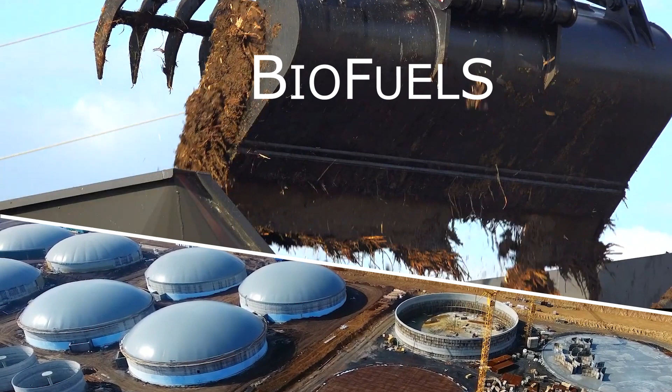Agriculture makes use of the most precious natural resources, land, water, sun, and is therefore responsible for reconciling production needs with environmental protection. Faced with a growing world population and changing food consumption, and the need to produce biofuels for the energy sector and materials with a low environmental impact, agriculture now plays a decisive role.

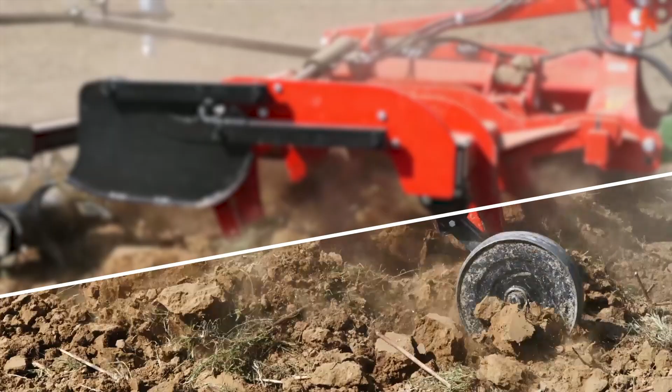The primary sector can only meet the great challenges of our time through the use of innovative machines and new generation technologies.

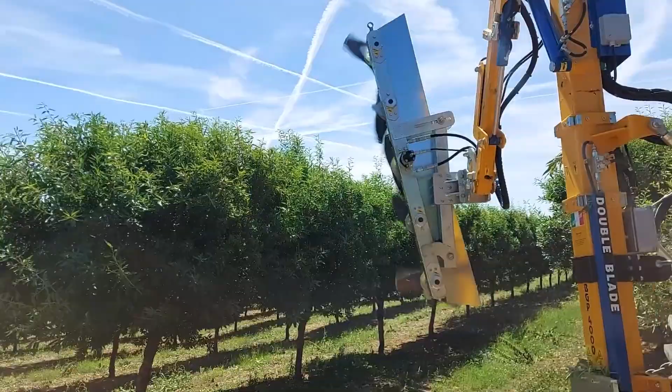Created to increase the productivity of the land and to support operators in the most tiring jobs, agricultural mechanization today has an additional function, that of managing production factors in a scientific way and ensuring the sustainability of the processes.

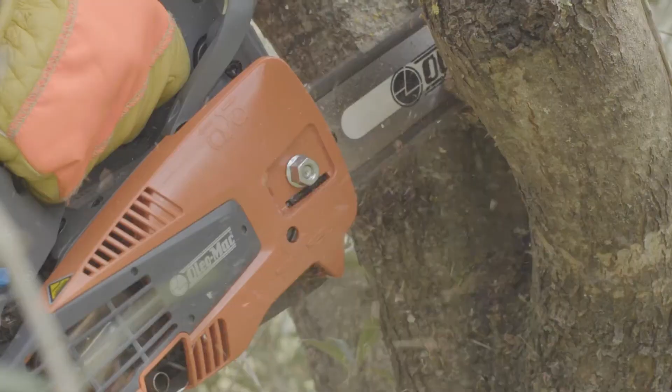On the gardening and landscaping front as well, mechanization is called upon to perform increasingly complex functions linked to citizens' health and quality of life.

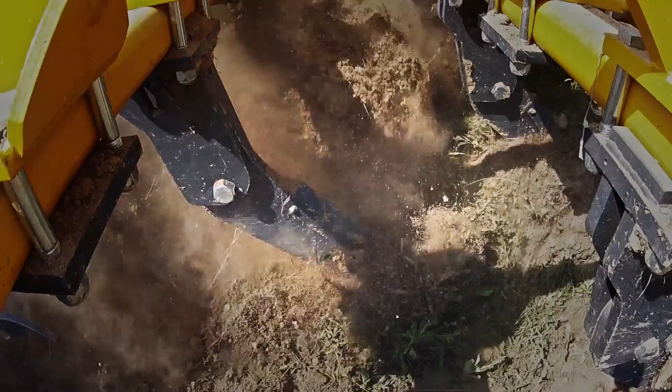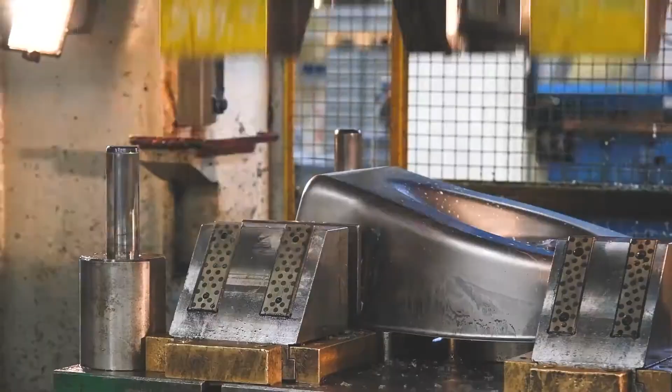Performing plowing and tillage without altering the organic structure of the soil, moving across farmland without soil compaction, performing treatments without dispersing pesticides into the environment, irrigating crops by optimizing water resources, harvesting produce by making use of residual biomass are the functions that agricultural mechanization has successfully tackled in recent years.

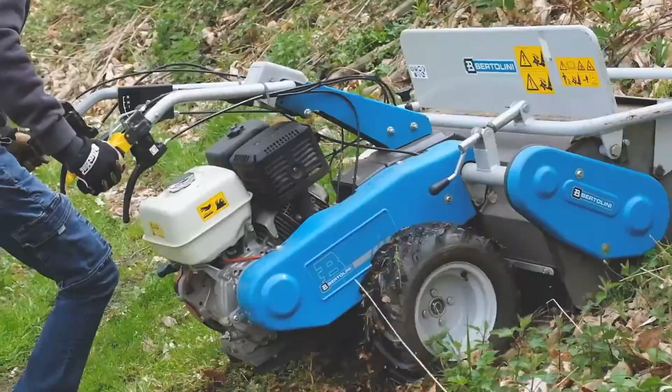Even in gardening, mechanization today offers safe technologies that are compatible with the metropolitan environment, offering innovative means in accordance also with bioarchitecture and new forms of aesthetic and recreational greenery.

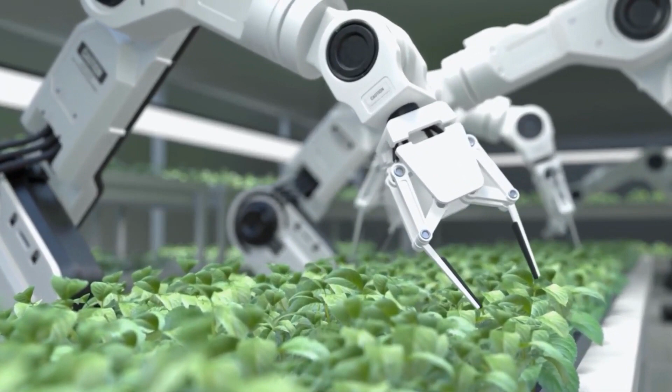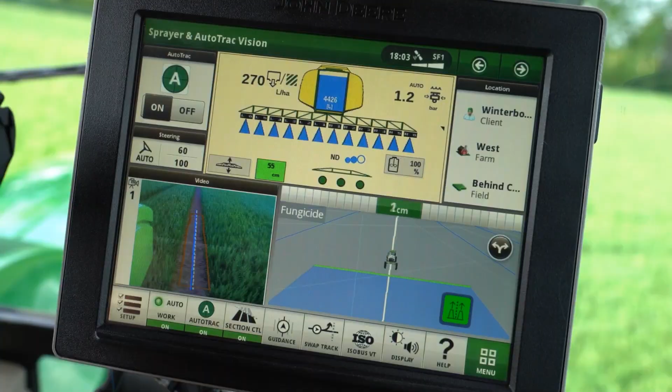New generation technologies enable a scientific approach to agriculture and green care, thanks to the increasingly widespread use of precision satellite and computer systems, sophisticated digital and IT tools, drones for specific interventions, as well as highly automated robots and devices.

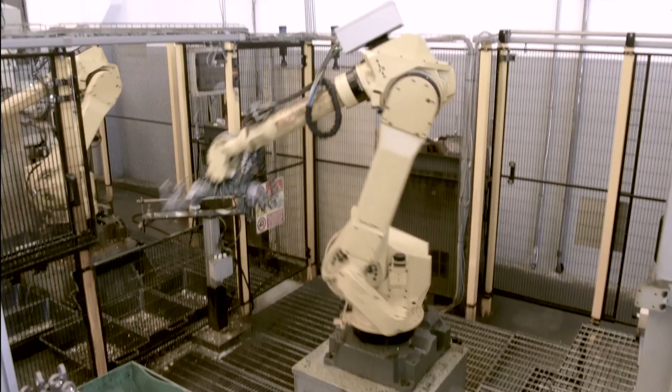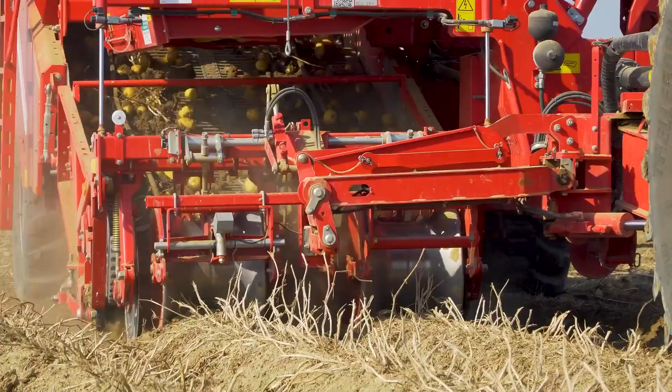In this industrial sector, Italy occupies a leading position worldwide in terms of production capacity, range, and quality of technologies. Innovative tools for soil tillage, sowing, treatments, harvesting and initial processing of products, transport, livestock farming, irrigation, forestry work,

gardening and landscaping, as well as specialized components, are produced by Italian industries in an infinite number of models, suitable for every production setting and every agricultural model.

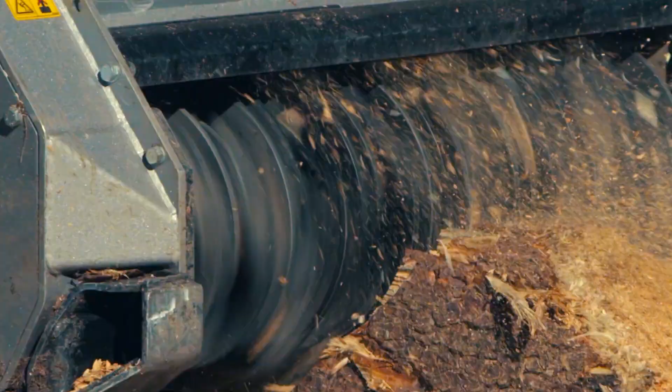Federunacoma, the Italian Federation of Manufacturers of Machinery for Agriculture, Forestry, Landscaping and related components, is the body representing these mechanical sectors. Founded in 1945 and a member of Confindustria, Federunacoma is made up of 7 specialized associations.

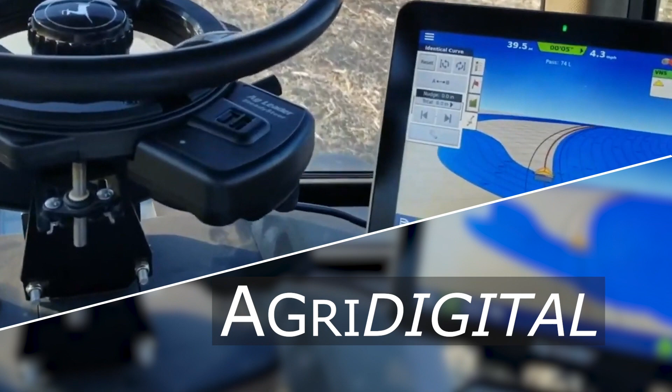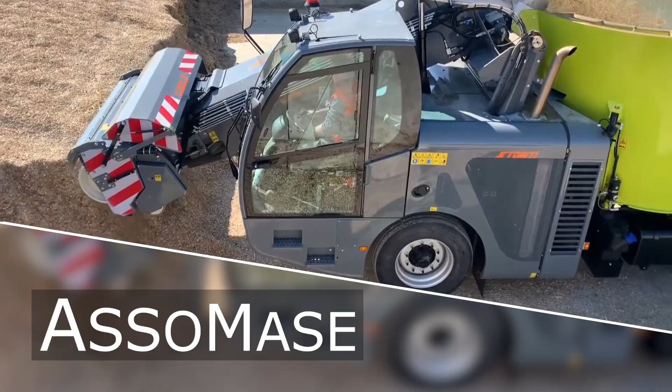AgriDigital for manufacturers of specific digital technologies for agriculture, AssoHidrotech for irrigation systems, Assomao for equipment manufacturers, Assomase for self-propelled operating machines, Assotrattori for tractors, Comacomp for components, and Comagarden for gardening.

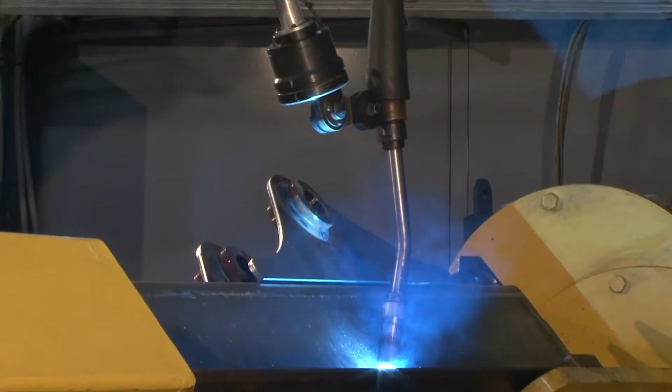The Federation brings together more than 300 companies, with a total turnover of around 14 billion euros, of which 65 to 70% goes to exports.

Its diverse structure includes offices in Rome, Bologna, and Brussels. As part of the European and international networks representing agricultural mechanics, it is an active participant in technical and political roundtables concerning the sector and offers a system of specific services for member companies.

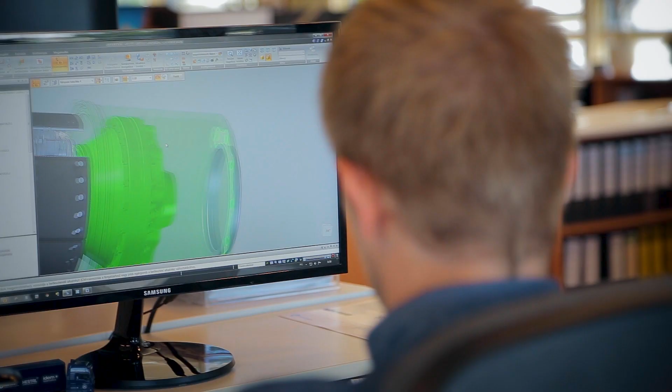Among the activities carried out by the Federation, technical and statistical services, promotion on foreign markets, training and research development are particularly important. With regard to research and training in particular, the Federation collaborates with universities and specialized centers in

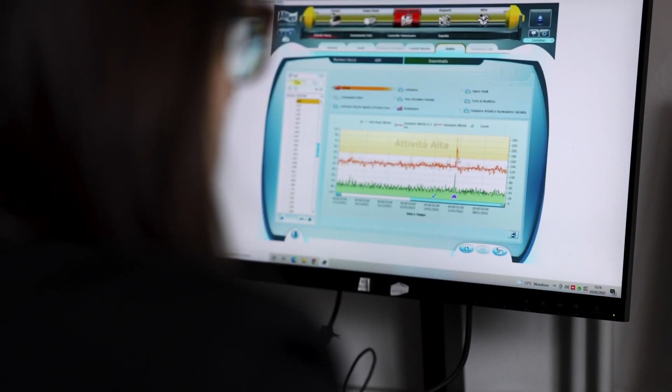various Italian regions, and is active in EU projects for the development of technologies suited to the growing needs of the primary sector.

The fundamental objective of FEDER-UNACOMA is the development of the mechanization market, which the Federation achieves not only by supporting companies and participating in promotional events and trade fairs in Italy and abroad, but also by organizing exhibition events of considerable appeal.

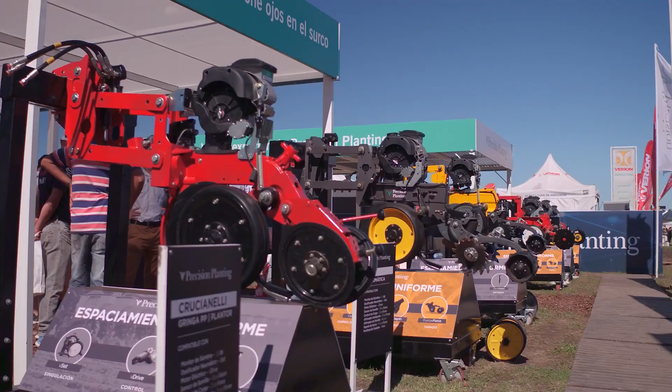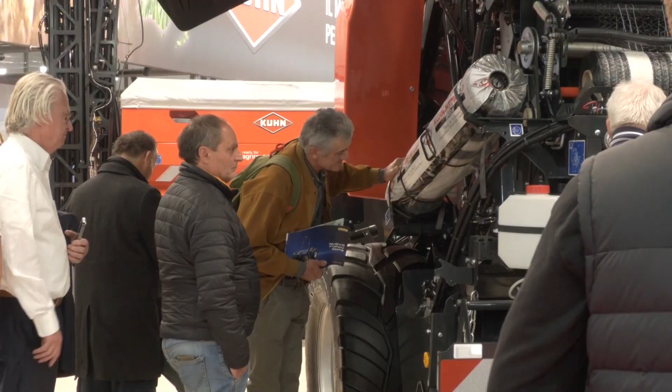EIMA International, the exhibition dedicated to agricultural machinery that is held every 2 years at the Bologna Trade Fair and is one of the world's largest sector events, is directly promoted by the Federation and organized by the service company FEDER-UNACOMA Srl.

In the pavilions of the Bologna Exhibition Center, one of the benchmark venues at the European level, where an expansion project is currently underway with the construction of new pavilions and the redevelopment of the district according to standards of excellence, EIMA presents more than 50,000 models of machinery and equipment, divided into 14 specialization groups.

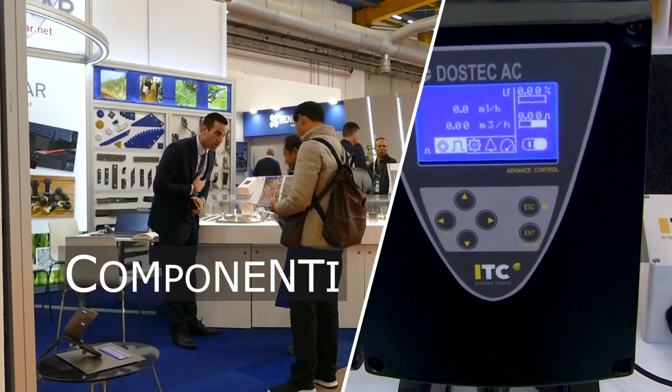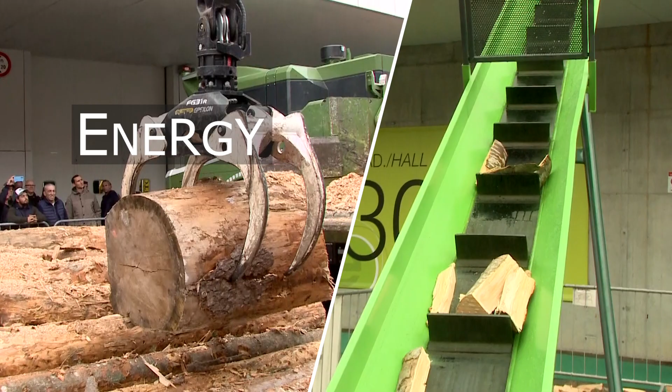These are supplemented by the components-themed shows, dedicated to components for the sector: Green for gardening and landscaping, Energy for bioenergy, Hydrotech for irrigation, Digital for electronic and IT applications, as well as the campus area reserved for education and training.

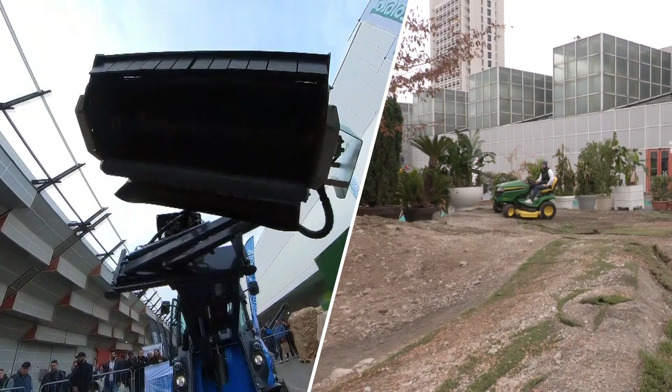Open-air arenas reserved for tractors, gardening, and bioenergy machines allow visitors to attend dynamic tests of the most innovative mechanical equipment.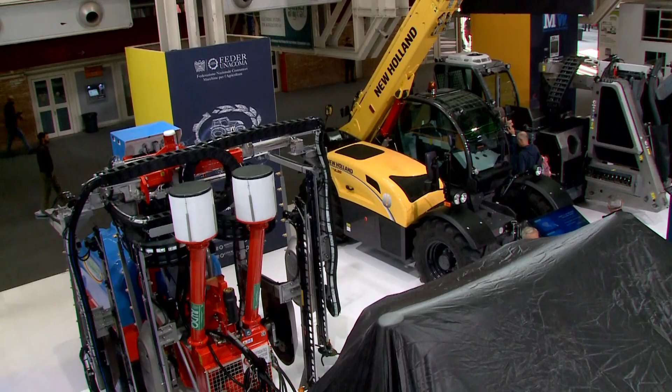An audience of more than 300,000 economic operators, farmers, contractors, and technicians, as well as agricultural and engineering students from 170 countries, meet at this biennial November event to learn about the most innovative technologies.

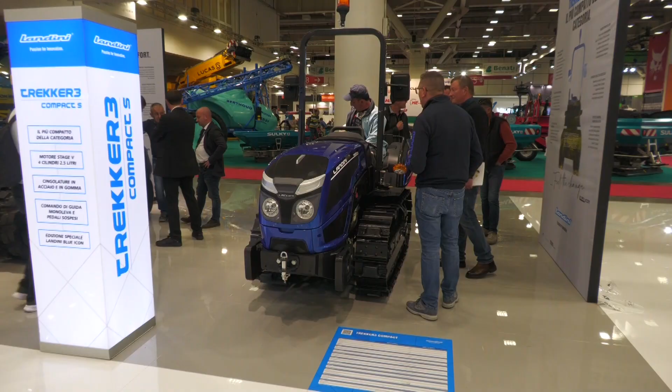They can compare machinery produced by some 2,000 manufacturers from more than 50 countries, participating in an event that is important not only on a technical and commercial level, but also in terms of communication, with a rich calendar of conferences and cultural initiatives.

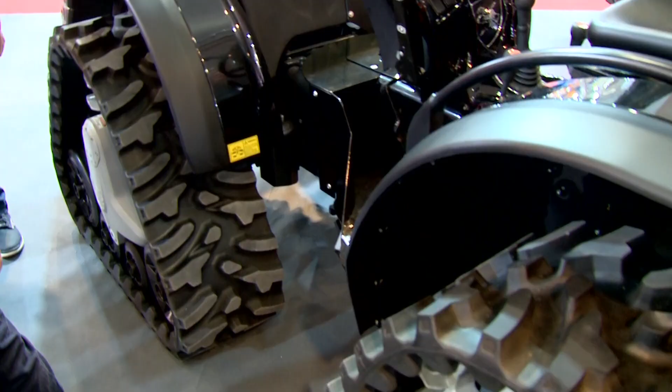Another important event is AgriLevante, the biennial exhibition of technologies for agricultural and agro-industrial supply chains, which FEDER-UNACOMA organizes in Bari in collaboration with Fiera del Levante, with around 400 exhibitors and over 80,000 visitors. It is the reference point for operators from the entire Mediterranean region.

Specialized exhibitions and events on agromechanics, and in particular on the vine and olive tree sectors, and on applied electronics and robotics, involve the Federation as an organizing partner.

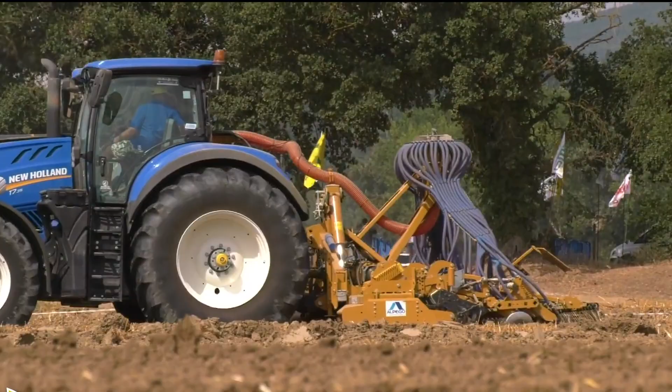Furthermore, field demonstrations called EIMA Show are organized in ever-changing agricultural settings, remaining one of the most striking formats in the range of events promoted by FEDER-UNACOMA.

Traditional fairs and field demonstrations also characterize the activities of the Federation abroad. Since 2009, it has been organizing dynamic events in India, above all the biennial EIMA Agrimach, in collaboration with the Indian Federation of Chambers of Commerce and Industry, FICCI.

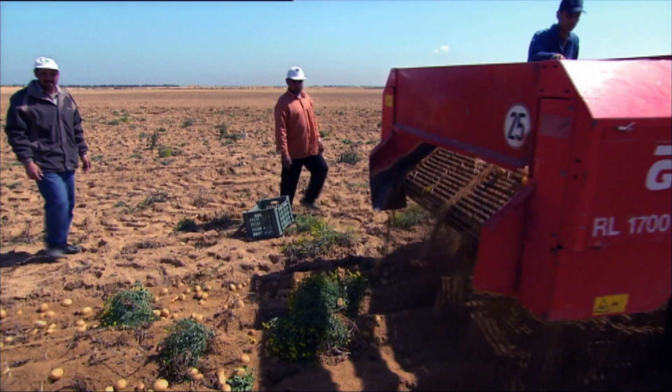FEDER-UNACOMA's calendar includes other exhibitions collectives, also organized in collaboration with the ICE agency, and trade fair partnerships in countries where demand for agricultural mechanization is developing.

Wherever agromechanical innovation spreads and Italian industry is present with its know-how and technologies, one can see how much inventiveness and research can do for agriculture and the environment.

Wherever the best industrial production is put at the service of agriculture, it is possible to reconcile the logic of production with the preservation of natural resources. It is possible to forge the new alliance between men and machines.